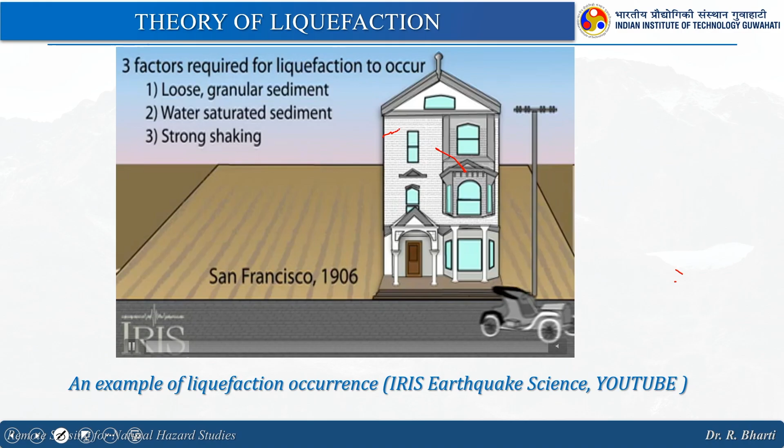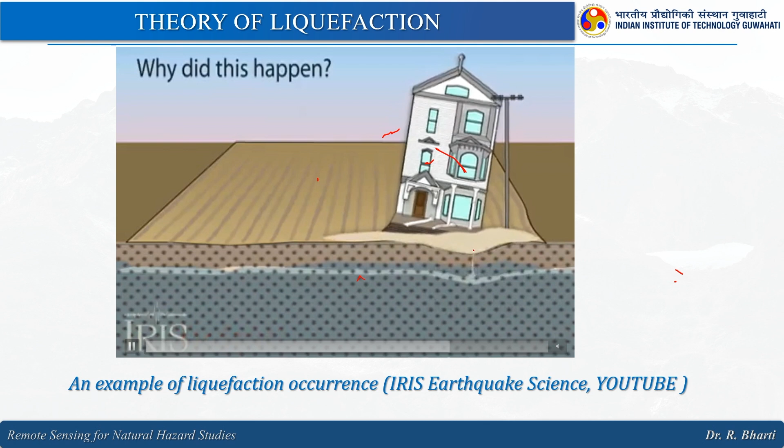So if you see this video, here you have loose granular sediment, and then you have strong shaking. This is the layer of granular sediment, and then you have groundwater saturating this layer, and at the same time you have this earthquake. We also discussed about the earthquake, and here this is the situation when it fails. This is the example from San Francisco, and it occurred in 1906.

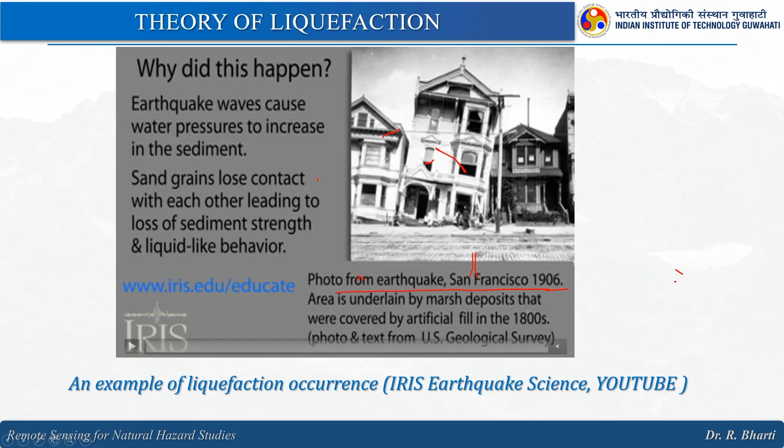Before we proceed, let us try to understand why a particular soil fails, or whether all soil fails. What are the different scenarios under which a soil fails? So, is the soil susceptible to liquefaction? That is the first question. And if the soil is susceptible, will liquefaction trigger? So susceptibility is one thing, but actually whether liquefaction is happening is another thing.

So here we have these points that we need to analyze for our soil. The presence of soil, whether the strata has a soil layer, because we are talking about liquefaction which is possible in the soil column. So the first one is presence of soil.

The second one is age of the soil deposit, whether it is newly formed soil or whether it is an old one. If it is a newly formed deposit, then what will happen? It will not be compacted, it will be loose granular.

Then what type of grain sizes are present, what type of soil is present, that is equally important. Then what is the topography, whether we are talking about elevated areas or flat lands, that is also important. Then history of seismic events, whether this particular area had any earthquake episodes, or whether any particular location has shown liquefaction behavior. This is very important, what is the history of that area.

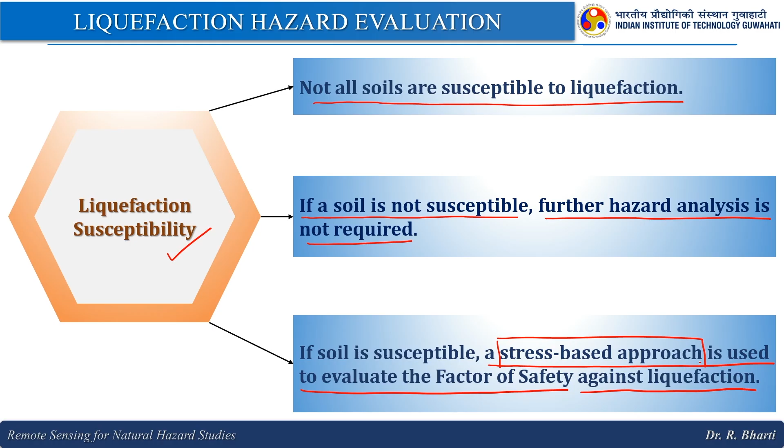So when we talk about liquefaction susceptibility, not all soils are susceptible to liquefaction. If a soil is not susceptible, further hazard analysis is not required, and if it is susceptible, we will go for the complete analysis. So when it is susceptible, a stress based approach is used to evaluate the factor of safety against liquefaction. Now we will try to understand all the parameters and details about the stress based approach, going one by one.

Now when we try to see the liquefaction susceptibility criteria, we have historical criteria, then we have geological criteria, and then we have compositional criteria.

So when we talk about historical criteria, we try to refer to historical information, and here we will try to refer to geological information. And the compositional criteria means what is the behavior, what are the properties of that particular soil.

So when we talk about this historical criteria, it has been observed that liquefaction repeatedly occurs in the same region. So in the same area we can expect again an episode of liquefaction. This historic dataset is used to develop different models to assess liquefaction susceptibility of a soil.

So once we know that these are the locations of liquefaction, we can have all the parameters of these locations that we will discuss, and then we will try to train our model so that for any given new location it will try to assess whether it is susceptible or not. So that is with the historical data.

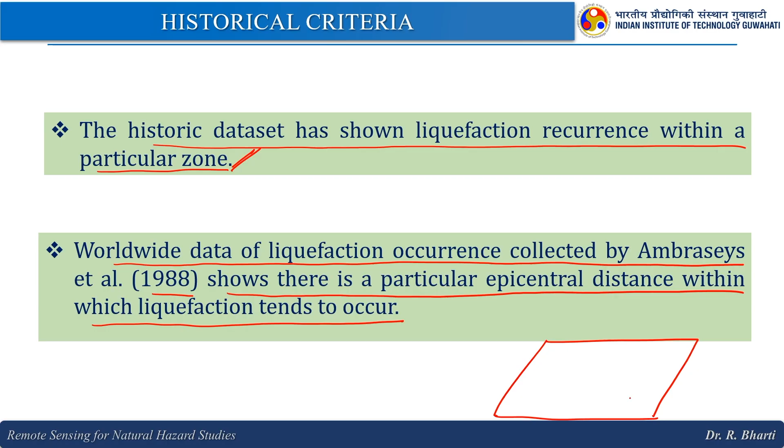So suppose if this is the area and this is the epicenter of the earthquake, we will have different distances from this, and there is a particular distance within which liquefaction is possible. That is being analyzed by this researcher.

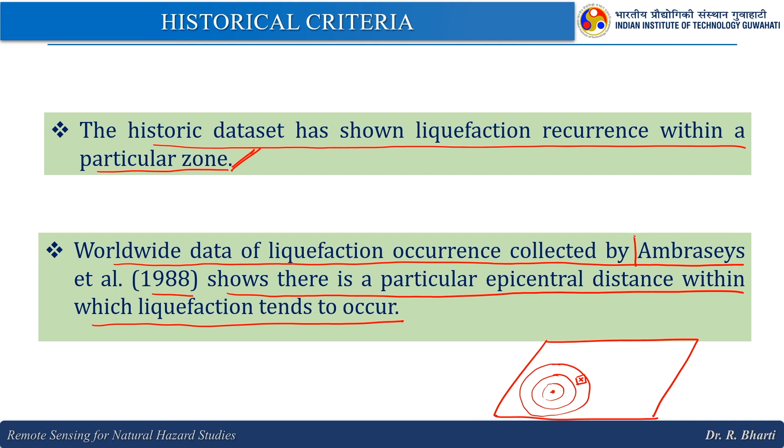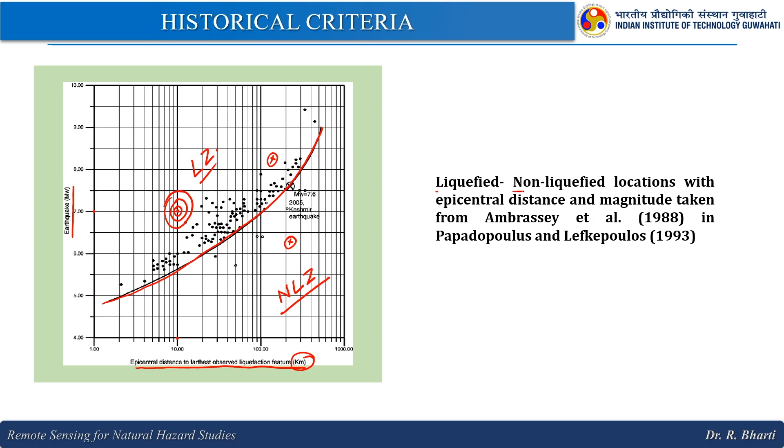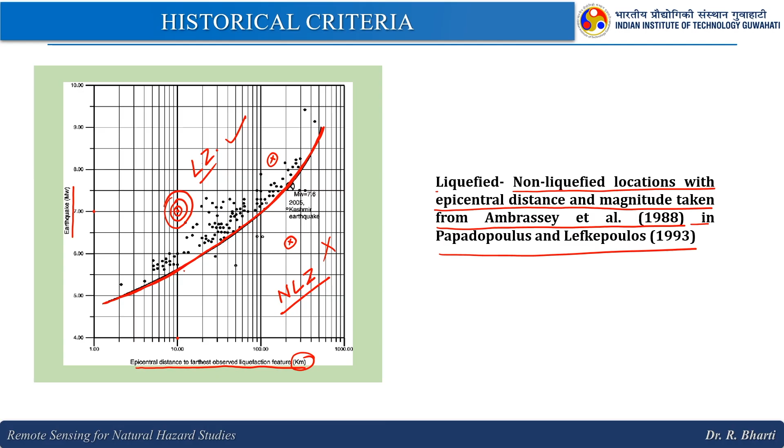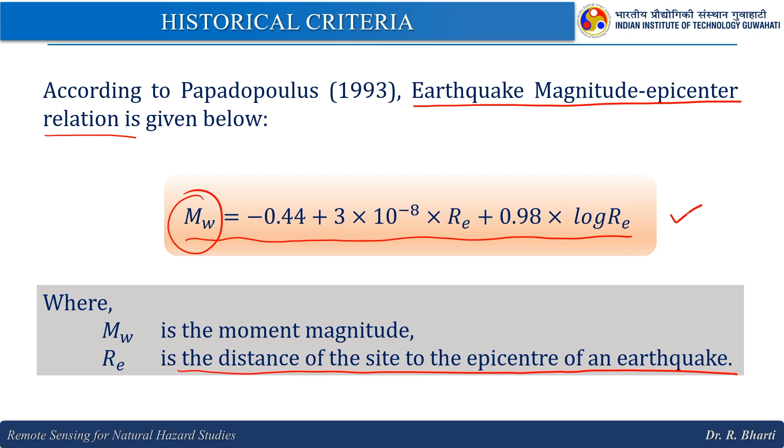So here you can see for this particular line we have this equation. This is the moment magnitude, and here RE is the distance of the site to the epicenter of an earthquake. So this is very important, earthquake magnitude epicenter relationship that defines whether your location is liquefiable or non-liquefiable.

Then comes the geologic criteria. The geologic environment for liquefaction susceptibility is very much narrow and specific. So there are very certain parameters which trigger the liquefaction. This susceptibility is very narrow and specific, as stated by Youd 1991.

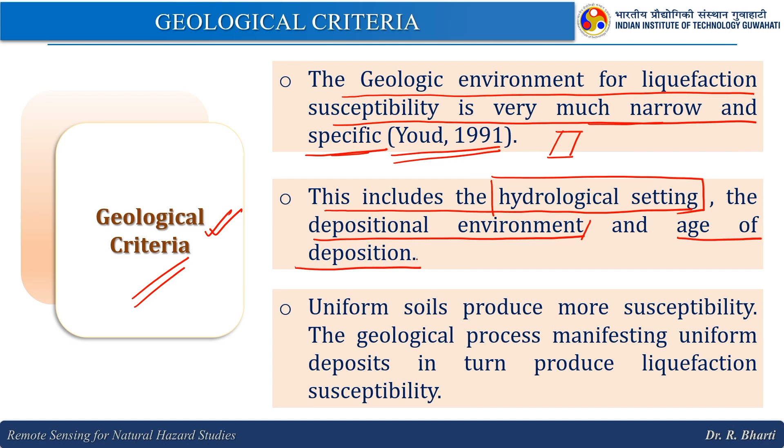This includes the hydrological setting - what is the hydrological condition of that particular area. The depositional environment - what are the depositional environments. Because we are talking about the geological criteria, and the age of the deposit. I mentioned this in the first slide, that age of the deposition also tells you what is the compactness of the soil, and what is the depositional environment, what is the hydrological setting.

Then comes, uniform soil produces more susceptibility. That means if you have one type of soil with one type of grain, what will happen? They will be more susceptible to failure or this liquefaction. Why? Because they will have pore spaces that will be available for this water.

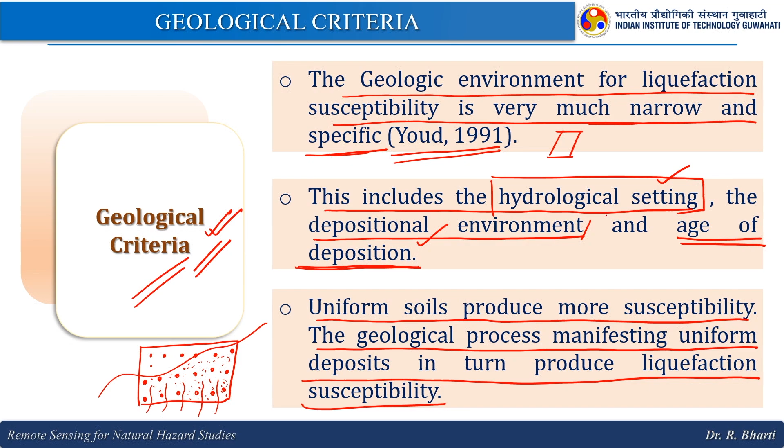When you have different gradation, what happens? These pores are filled with fine grains, and then this particular soil will not be susceptible. So we will see that in the other part. So here it says the geological process manifesting uniform deposits in turn produces liquefaction susceptibility. So we need to be very careful about the hydrological setting, depositional environment and age of the deposition.

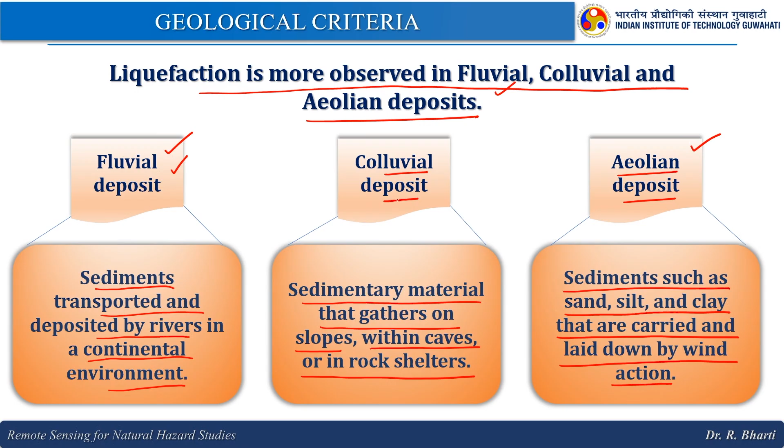Then liquefaction is more observed in fluvial, colluvial and aeolian deposits. The fluvial deposit is sediments transported and deposited by rivers in a continental environment. Then colluvial - sedimentary material that gathers on slopes within caves or in rock shelters. Then comes the aeolian - sediments such as sand, silt and clay that are carried and laid down by wind action. So that is the characteristic of aeolian deposit. These three types of deposits have more probability of liquefaction.

Soils from Holocene - the Holocene is the most recent one, if you see the different time frames of the geological periods. So Holocene period soils are more susceptible to liquefaction compared to those from the Pleistocene period. When we talk about the Holocene, often found in low lying areas such as floodplains, deltas, coastal regions, these soils are more likely to be saturated with water, because water plays a significant role here. High water content increases pore pressure during seismic shaking, leading to liquefaction.

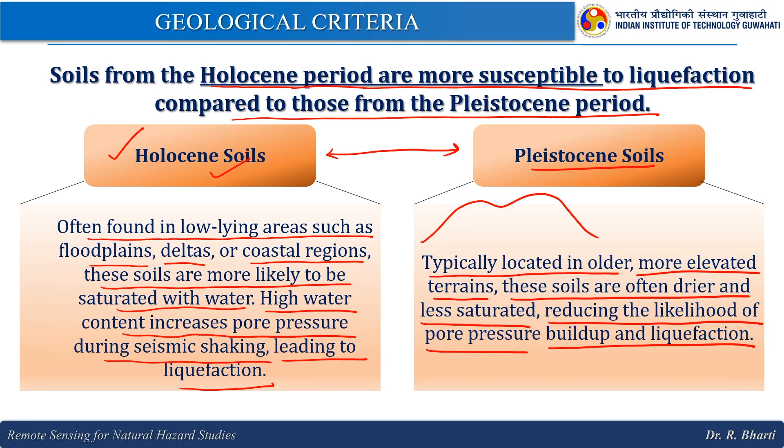And when we talk about the Pleistocene, typically located in older, more elevated terrains, these soils are often dried and less saturated, because we are talking about elevated regions, reducing the likelihood of pore pressure buildup and liquefaction. So that is the major difference between these two. Holocene soils are more susceptible to failure or liquefaction.

Human made soil deposits, because of anthropogenic activities we are having soil deposits, also need attention. Uncompacted loose fills in particular are highly prone to liquefaction, because they are not compacted, and during a seismic event there will be shaking, and if there is water availability, the groundwater is nearby, then you will have more chances of liquefaction. The stability of hydraulic dams and mine tailing piles, where soil particles are loosely deposited through water sedimentation, continues to be a significant modern seismic hazard.

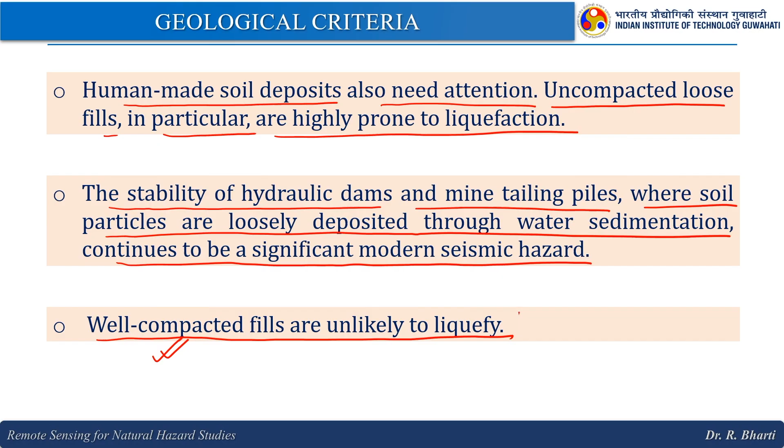Well compacted fills are unlikely to liquefy, though man-made or anthropogenic activities are involved in this, but this is having very less likelihood to fail.

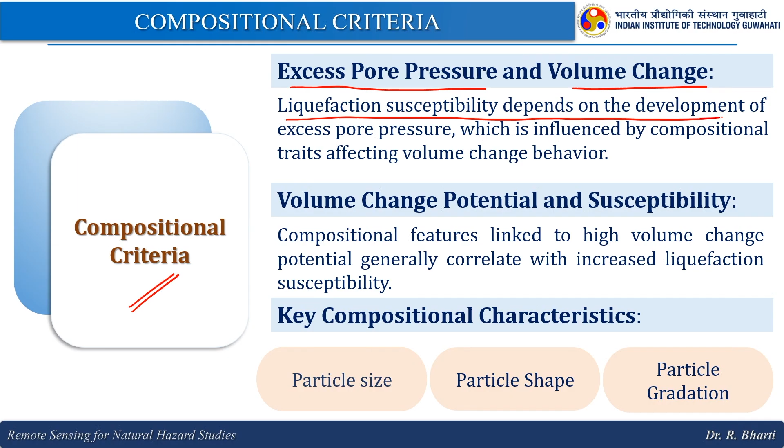When we talk about this compositional criteria, so we have two things: excess pore pressure and the volume change. Liquefaction susceptibility depends on the development of excess pore pressure, which is influenced by compositional traits affecting volume change behavior. For example, just imagine, it is not related to liquefaction, but there are certain clays which have a tendency to expand. So whenever contacted with water, they expand, the volume changes.

Similarly, certain types of soils expand their volume, and when they expand, the compactness will be less, and during that time, if you have seismic events, that particular deposit will have high potential for liquefaction. Volume change potential and susceptibility - compositional features linked to high volume change potential generally correlate with increased liquefaction susceptibility.

From this we can say that key compositional characteristics are particle size, particle shape and particle gradation. So when you are having different types of particle size, or you have very good distribution of particle size, then you have less vulnerability to liquefaction.

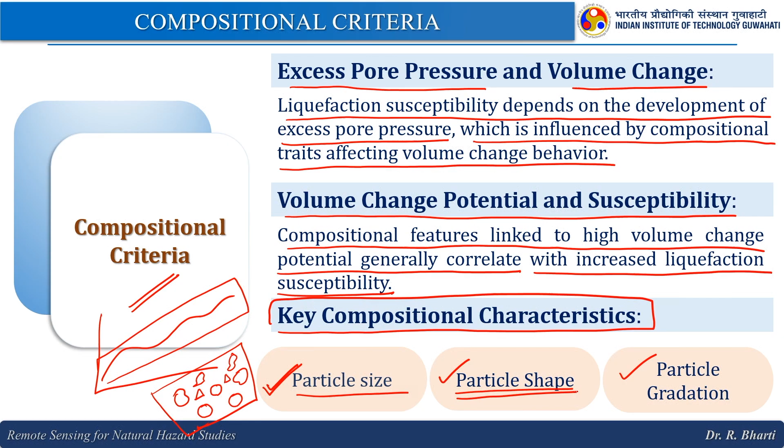When we talk about particle shape, if you have similar grain sizes, you have higher potential for liquefaction. When you have rounded, triangular or irregular shapes, they will help get the particular deposit compacted. So similar types of shape will be more vulnerable to liquefaction, while different types of shapes available in a soil will be less susceptible to liquefaction.

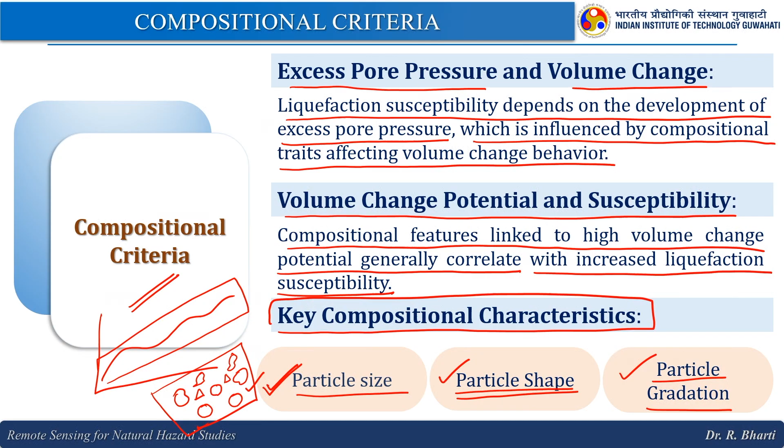Similarly, this is the gradation. If the distribution is good, then you will have less susceptibility to liquefaction. This is one of the very widely used criteria, called the Chinese criteria, given by Wang et al.

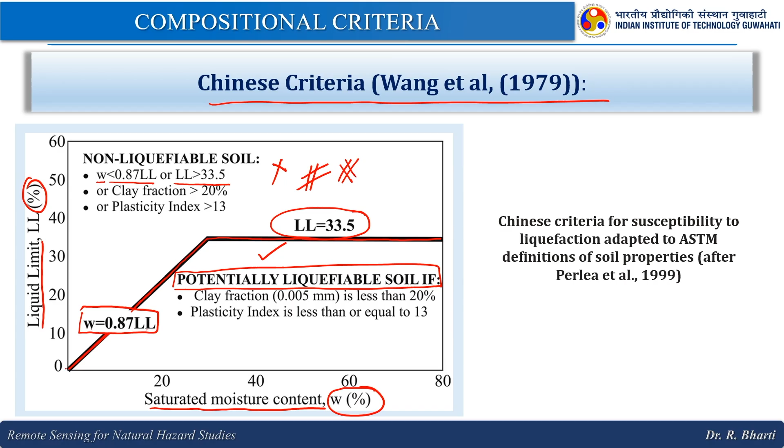So that is the criteria here: the clay fraction is greater than or equal to 20%, or the plasticity index is greater than 13. These are the criteria that you have to check for your soil before you go for the hazard analysis.

If your points are falling in this region, your deposit or soil column is safe. If they are falling in the other region, how do you check that? Using: clay fraction less than 20%, plasticity index less than or equal to 13, or W equals 0.87 LL — less than that it will be non-liquefiable, more than that it will be liquefiable, and liquid limit greater than 33.5 is non-liquefiable, less than this it will be liquefiable. This particular method is widely used to assess whether your soil column has the potential for liquefaction or not.

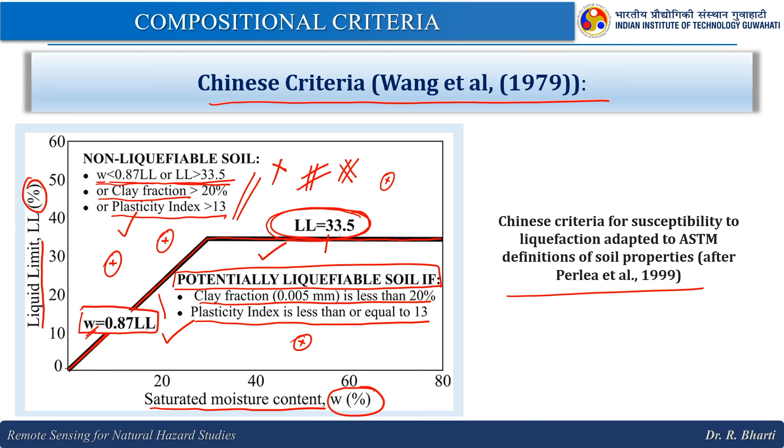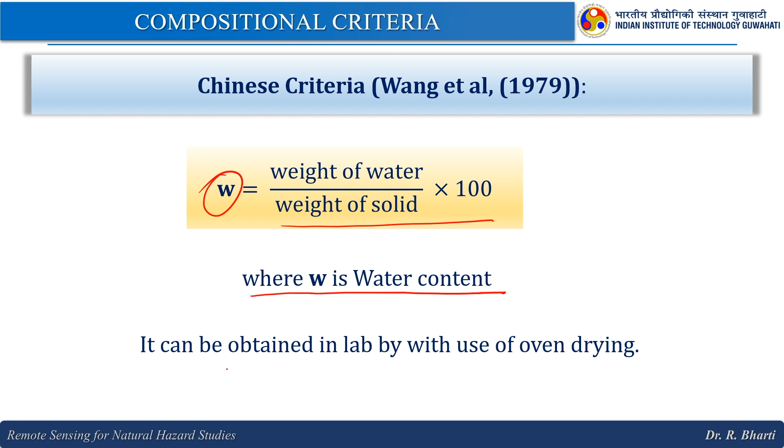So when we talk about this weight percentage, that is calculated using this equation, where W is the water content, and it can be obtained in the lab by use of oven drying.

Now, when we talk about PI, which is the plasticity index, that can be calculated using the liquid limit and the plastic limit. The liquid limit of a soil is the moisture content at which the soil transitions from a plastic to a liquid state, and the plastic limit is the moisture content at which a soil transitions from a plastic state to a semi-solid state. The plasticity index, PI, is a measure of the range of water content over which a soil remains in a plastic state, calculated as the difference between LL and PL.

So we are using the liquid limit and plastic limit to calculate the plasticity index, and that is very helpful when we are using this Chinese criteria to assess whether our soil is susceptible or not.

The clay fraction of a soil refers to the proportion of soil particles that are smaller than 0.002 millimeter, or 2 micrometers, in size. Clay particles are the finest fraction of soil and play a significant role in determining the soil's physical and engineering properties such as plasticity, cohesion and water retention.

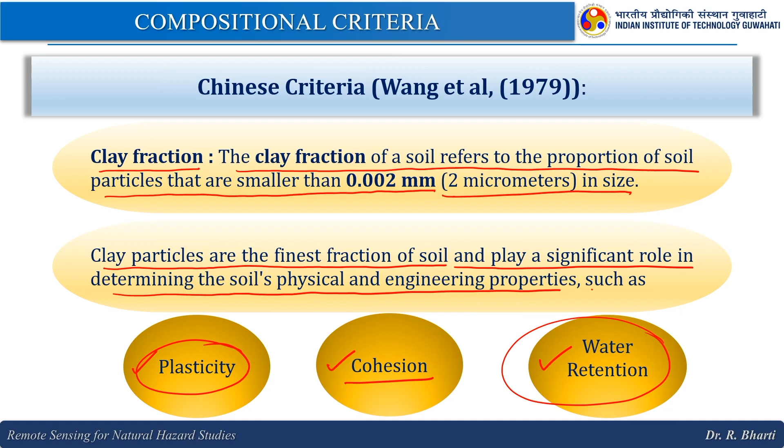This plasticity we have already seen in the previous slide. Cohesion is basically how cohesive the grains of your soil are. If you have more water content, the cohesion will be reduced. And what is the water retention capacity of your soil? That is also needed to evaluate the properties of your soil.

Then, other than this Chinese criteria, we also have the Andrews and Martin criteria, proposed in 2000. According to this criteria, the potential liquefiable soil will have less than 10% clay fraction and less than or equal to 32% liquid limit. For non-liquefiable soil, the clay fraction is greater than 10% and the liquid limit is greater than 32%.

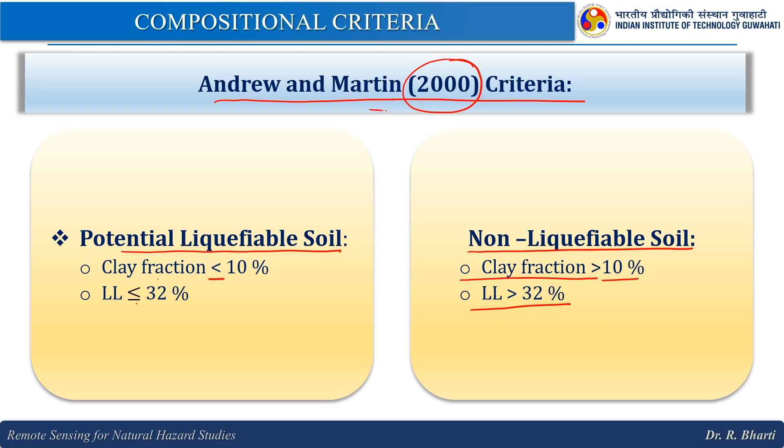So other than Chinese criteria, this Andrews and Martin criteria is also being used to initially evaluate whether your area has susceptibility to liquefaction or not. Then we have the Tsuchida criteria, also proposed in 1970, where the range of grain size distribution for liquefiable soil is used.

The x-axis has the particle size and the y-axis has the percent finer — how much percent is present when you see a particular soil column. So if you have different types of grains or different types of soil, then we assume this is very good and it is safe, and liquefaction is not possible.

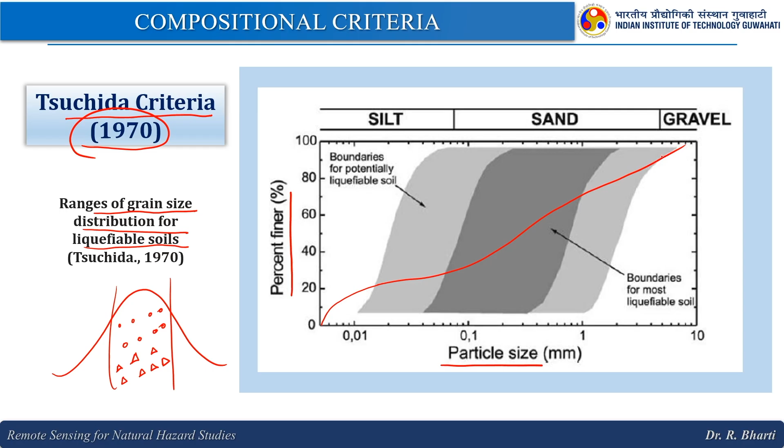If you assess the particle size distribution of any soil, and it is falling in a region that includes silt, sand and gravels, with the percent finer also changing, then this particular soil is not susceptible to failure. But if a soil column has only one type of material, only sand, or only gravel, or only silt, such soils are susceptible to failure.

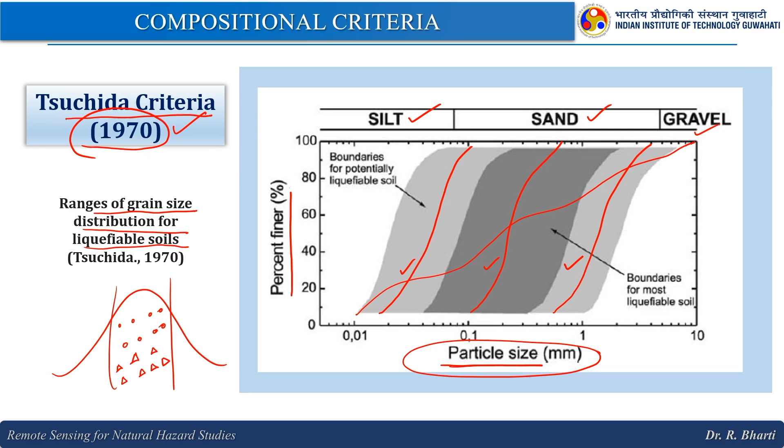Why? Because they will not be compacted when there is a seismic event. When shaking occurs due to seismic events, different types of grains present in the soil will get together and become compacted. That is the basis of the Tsuchida criteria, which is an alternative to the Chinese criteria for evaluating whether soil is susceptible to liquefaction.

Using the previously explained methods like Chinese criteria or Tsuchida criteria, you can assess whether your soil is susceptible to liquefaction. If it is liquefiable, we go for evaluation of liquefaction potential. If not, no further evaluation is needed.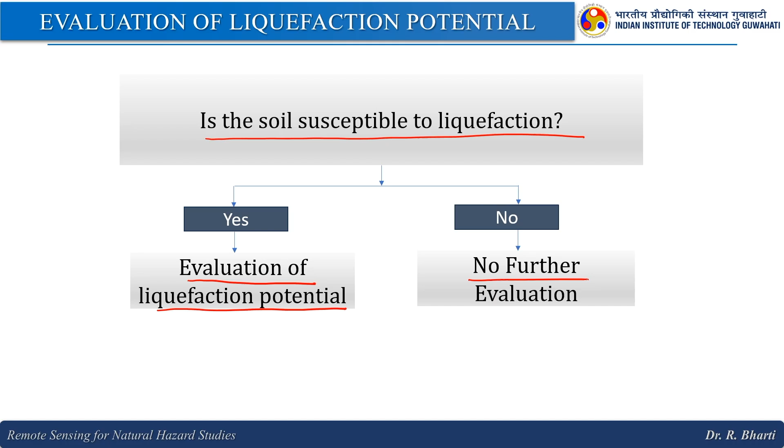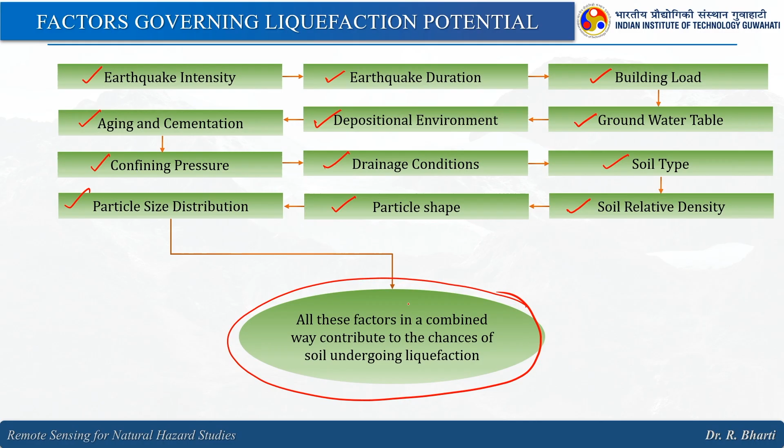When we go for further evaluation, if the soil has come into the liquefaction zone, we consider parameters like earthquake intensity, earthquake duration, building load, groundwater table, depositional environment, aging and cementation, confining pressure, drainage conditions, soil type, soil relative density, particle shape, and particle size distribution. All these are used to assess the susceptibility to liquefaction.

When we talk about all these parameters, some can be measured in the field, that is in situ measurement, and some are measured under lab conditions. One laboratory based method is the cyclic triaxial test.

In the cyclic triaxial test, cyclic loading is simulated and the response of soil is reported. The number of cycles for liquefaction initiation is observed, so we try to see at what cycle liquefaction occurs, and that number of cycles is noted.

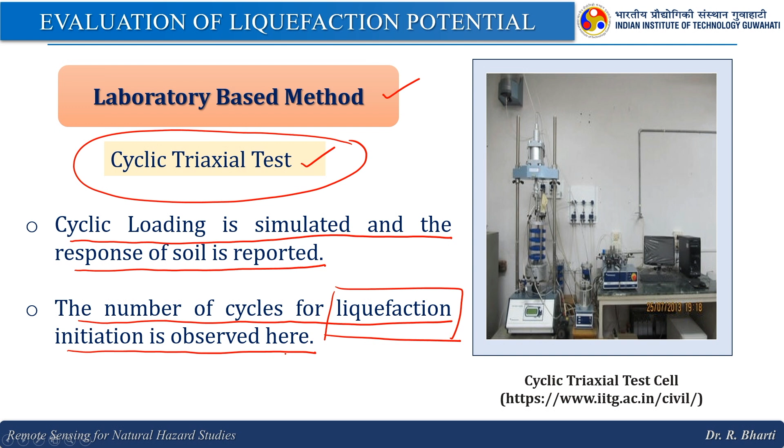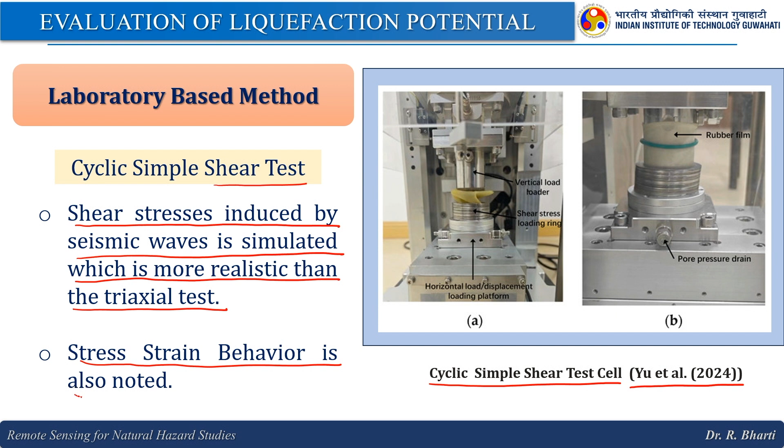Then comes the cyclic simple shear test. This is the cyclic simple shear test cell, from Yu et al 2024. Here, shear stresses induced by seismic waves are simulated, which is more realistic than the triaxial test. Stress strain behavior is also noted, which is used for further analysis of liquefaction.

Then comes the resonant column test, where dynamic properties of soil such as shear modulus and damping ratio, critical for liquefaction analysis, are evaluated. This is a typical resonant column test. The shear modulus and damping ratios are derived from the resonant frequency and decay of vibration, used in liquefaction potential analysis. These are the instruments used in the lab to evaluate the liquefaction potential for a given soil.

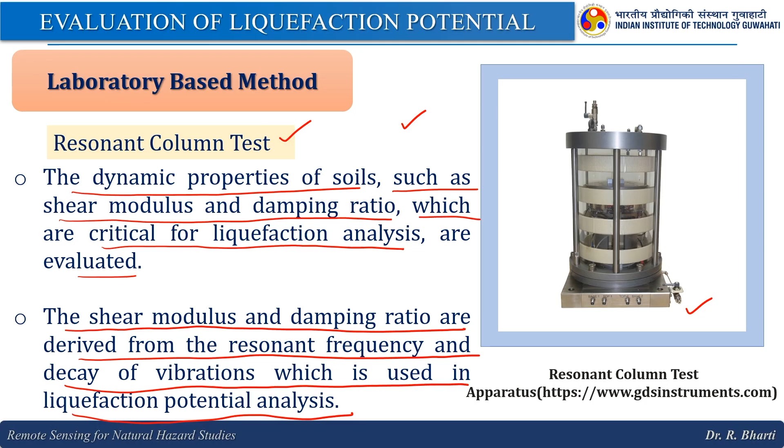The soil will be collected from the area which has shown properties placing it in the liquefiable zone, perhaps using the Chinese criteria, the Tsuchida criteria, or some other criteria, and then we move towards characterization.

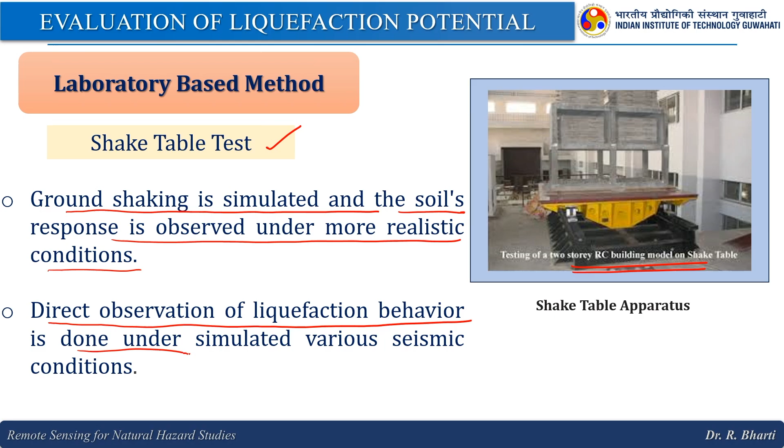We also have the shake table test, where ground shaking is simulated and the soil's response is observed under more realistic conditions. Here you can see the diagram of the shake table apparatus. Direct observation of liquefaction behavior is done under simulated various seismic conditions, which provides input to analyze whether your soil is liquefiable.

This is another method called SPTN. When we talk about laboratory based methods, these are very hectic. You have to visit the field, collect the sample, and then analyze various parameters. You should have access to advanced instruments; only then will you be able to study liquefaction.

To overcome this challenge, Seed and Idriss in 1971 came up with the stress based approach that I will discuss in the next few slides. In this approach, they correlated the liquefaction potential to the standard penetration test result, SPTN, because SPTN is very common in geotechnical engineering studies.

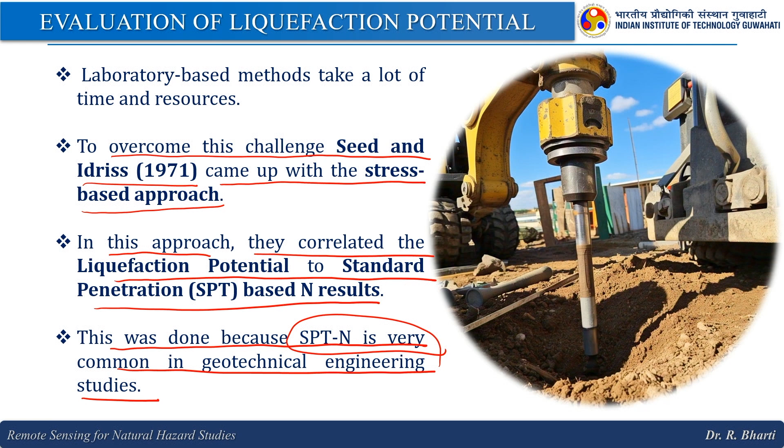Since we have seen the instruments used in liquefaction potential evaluation, these are not really available to everyone. To have an alternative, Seed and Idriss thought of using another parameter which can be evaluated easily. So they investigated the SPTN value, to see whether it can be utilized for evaluation of liquefaction. This SPTN is a very common property measured in geotechnical investigations, which is why it has been investigated to find whether it has any correlation with liquefaction.